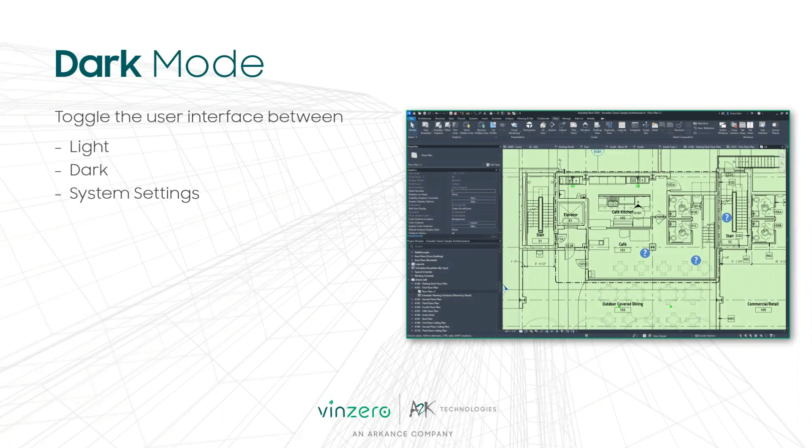You can control the canvas independently. I call this one drawing board green. To access the UI color state, you go to File Options, Colors. There you can specify colors for the background, selection, pre-selection, alert, calculations, and rebar editing. And of course, whether the UI is light or dark or relies on the Windows system settings.

Your Windows system settings can be found by searching for the word color in your Windows taskbar to bring up the color settings dialog. The default app mode will dictate your light or dark settings for Revit.

There's been a UI modernization to go along with the major overhaul. They've changed all the iconography, and this is in support of the light and dark UI. I think they've done an excellent job at tweaking the icons without making the new ones feel foreign.

The project browser search and performance is a huge improvement. In previous releases, the search was hidden away in the right-click menu. You'd have to cycle through results in the browser tree, and the search results wouldn't be filtered.

Looking at the new project browser, the search is persistent at the top of the browser. The search highlights and filtering is instant as soon as you start typing.

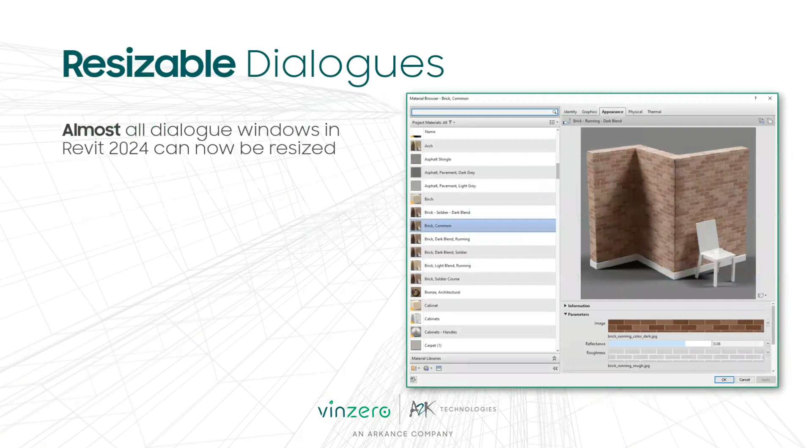Apparently, more dialog boxes have been adjusted now to be resizable. This isn't the case for all dialog boxes, so in this instance, it'd be handy to see the full file path. But I think they're making headway into expanding more of the user interface experience.

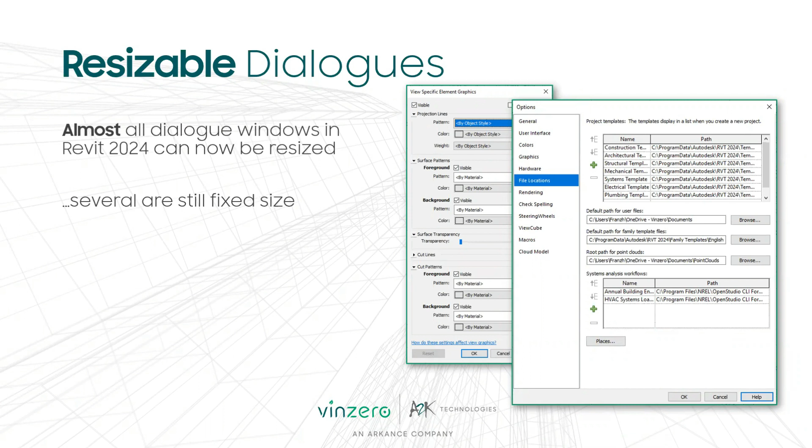Modelling improvements. There's a new series of templates. There's a new multidiscipline template that contains a starting view with updated fonts. So the new font they're using is Trebuchet and preloaded content for each category.

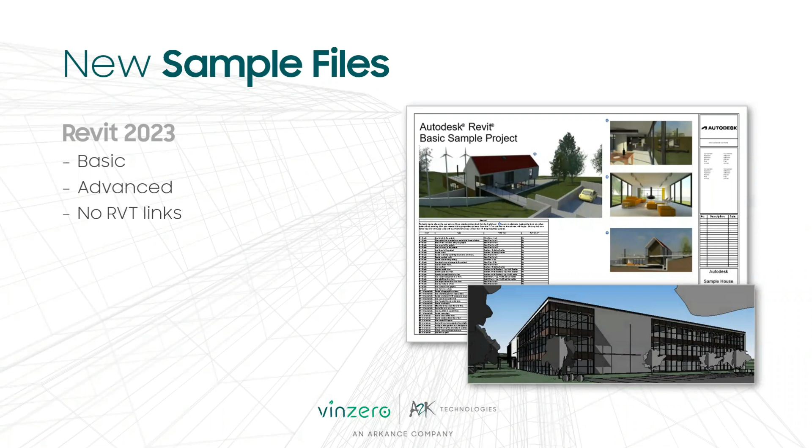In Revit 2024, there's a new series of sample files. In Revit 23, we had the basic house on the hill and the advanced office building. These were standalone files without any Revit links. Revit 2024 presents a new series of sample files covering all disciplines in separate Revit links, which is closer to a real world scenario.

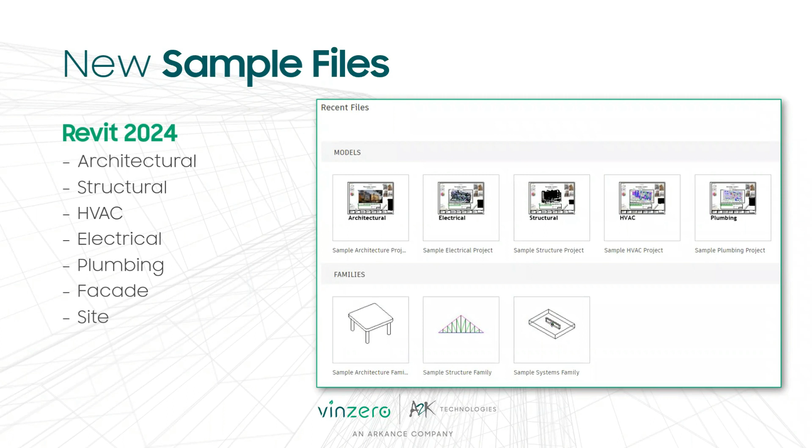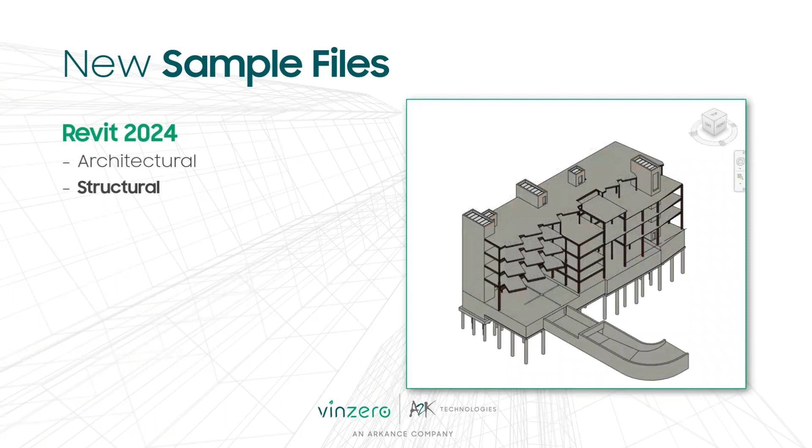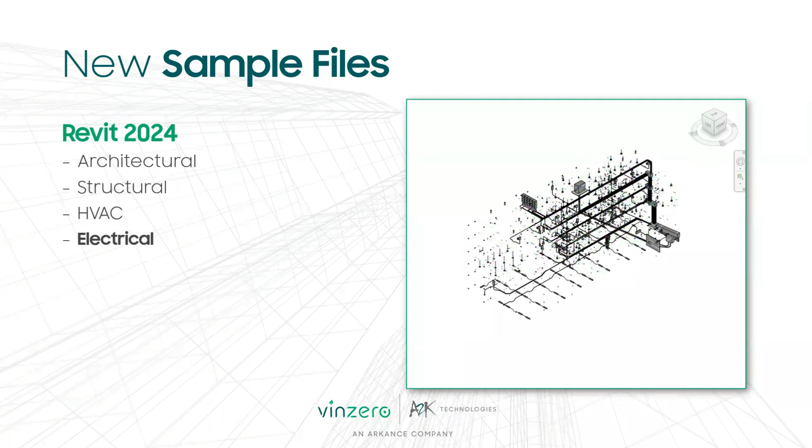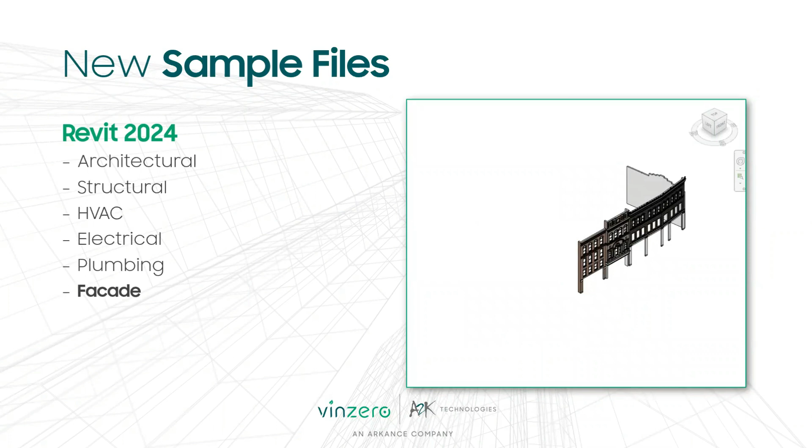We'll walk you through the content of each of these. We've got the architectural model. This includes advanced concepts such as phasing and design options. We have the structural model, which is predominantly concrete. The mechanical, heating, cooling and ventilation model. A full electrical model. Plumbing and drainage. And there's even a historical facade that's been modelled referencing a point cloud survey. And finally, there's the site model illustrating new Toposolid features.

So all these combine to present a real world example of how we typically work. There's a point cloud survey available for download via the Autodesk Revit 2024 website. It's a 5.7 gigabyte download, hence it's not part of your standard install. Once downloaded, the zip file expands to be about 8.5 gigabytes, the contents of which is a recap point cloud and a whole bunch of supporting files.

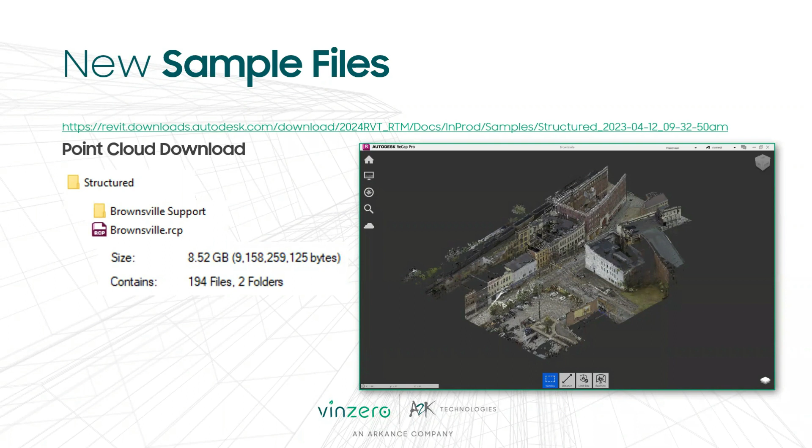Supporting files contain a number of registration points around the site. When viewing this in ReCap, the registration points will be listed down the left-hand side, and the point locations are illustrated in the top right plan view, where the line of sight cone of vision is illustrated with a blue gradient.

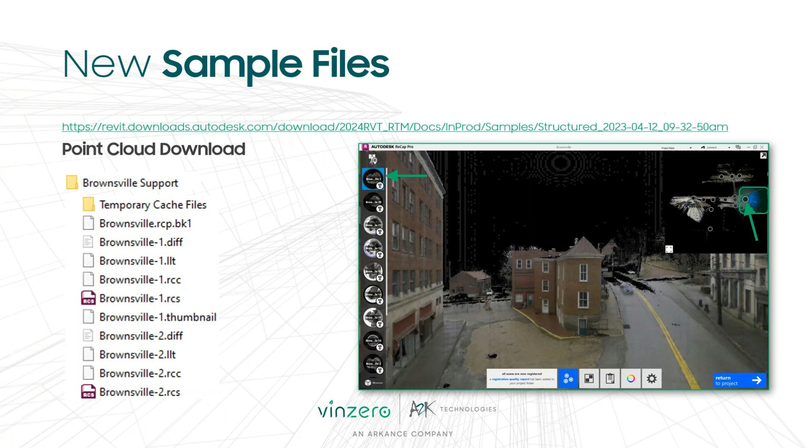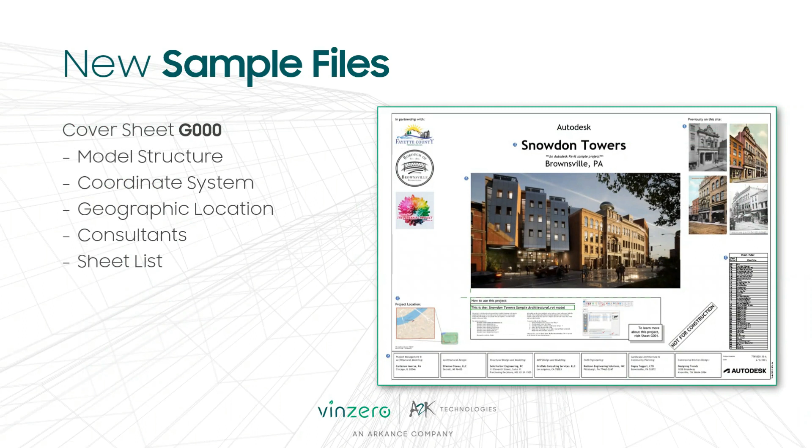Opening up the architectural model, the cover sheet G000 contains information on model structure, the coordinate system, and the geographic location of the project. There's a list of consultants and also a sheet list. Furthermore, there are instructions on how to use the project, providing insight on how the files and links go together.

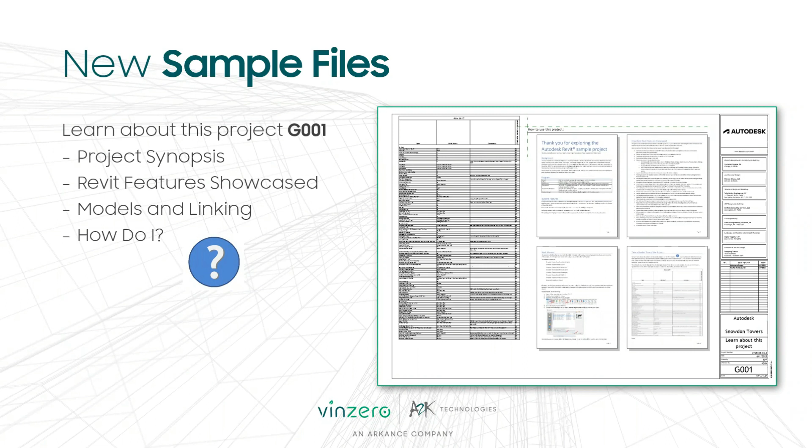On the second page, G001, there's a project synopsis describing where the project is and how it came about, a list of Revit features that have been showcased in the model, a list of models and links, and a schedule of 'how do I', which is this schedule with blue question marks.

The sample file is intended to double as a training tool to provide examples of various modelling techniques. From the schedule, you can see if you want to look for a particular modelling technique, which view best illustrates that feature. So if we're looking at placing stairs and railings, we can go to the Level 1 view to see more about stairs and railings.

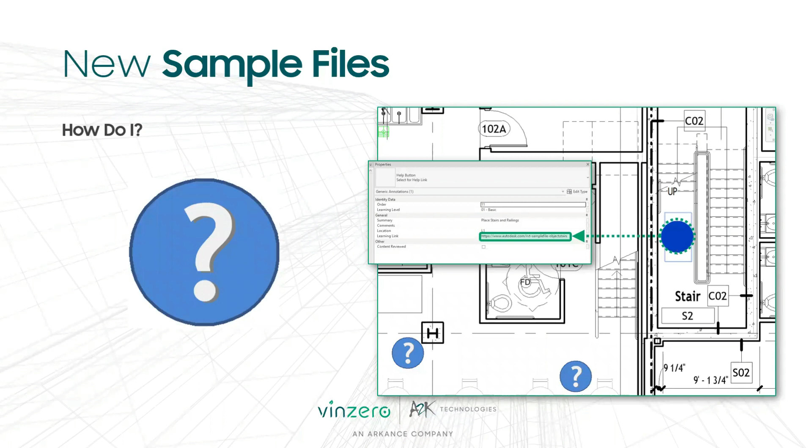These blue question marks are also populated across the drawing set. In the plan view here, these are generic annotation families. When you click on the family in the object properties, you'll see a learning link URL in the element properties, and that will take you to the Revit 2024 documentation online, where you can learn more about the features.

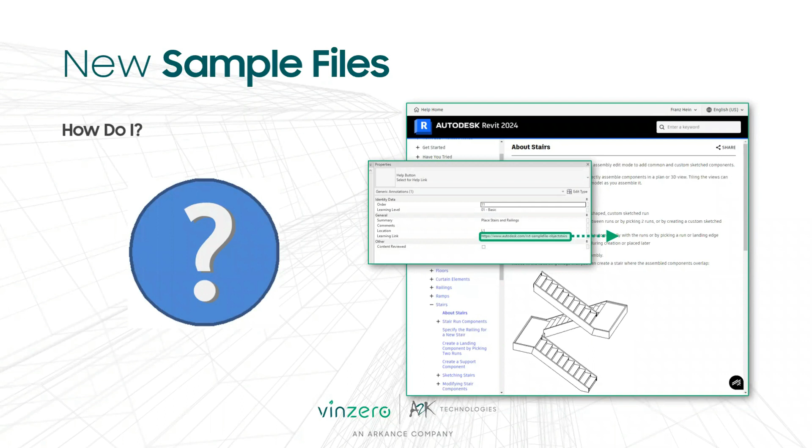The site tools for Revit 2024 have had a major overhaul. There's a departure from Topo Surface, and Toposolids now have volume.

Split surface and subregions have been replaced with subdivide. Now we've got more warnings to deal with or vet, as Toposolids are volumetric, so it will report when it's interfering with other elements.

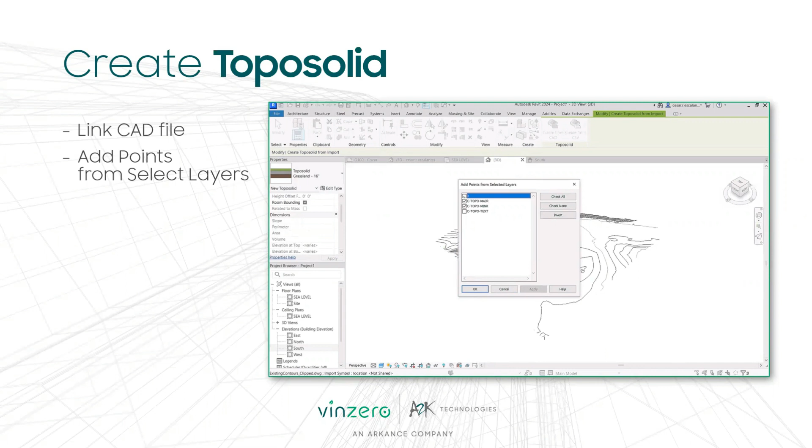To create a Toposolid from a CAD link, which traditionally is very similar to creating a Toposurface, you'd link in the CAD file, select Create Toposolid from Import, select your CAD import, and specify the layers used to generate the points. Typically these would either be contour layers, or if you've got a TIN, a triangulated irregular network, you may be using that layer.

When you click finish, the Toposolid will be generated using the current Toposolid type. You can swap types or duplicate a type, similar to any other system family. It's worth noting that Toposolids are room bounding.

You're not just limited to generating Toposolids via CAD links or imports. You can also generate these from a sketch or a CSV file of points if you've been provided with that data.

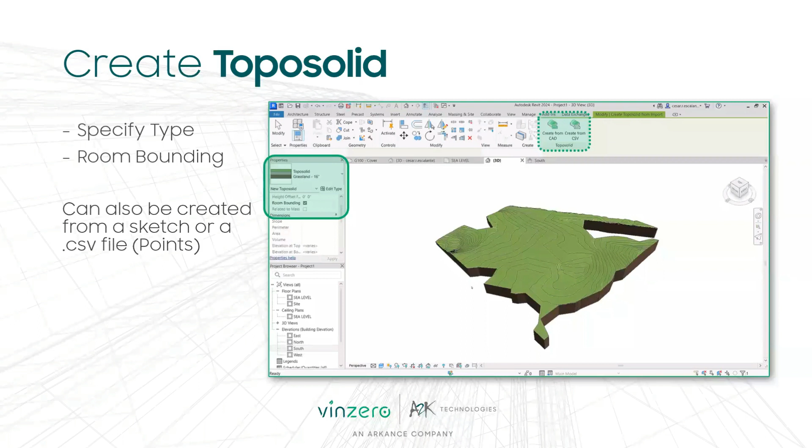If you're defining Toposolid types, you'll notice these are very similar to floor families — it's a composite layered structure which is editable. To access that, you go to the type properties and edit the structure.

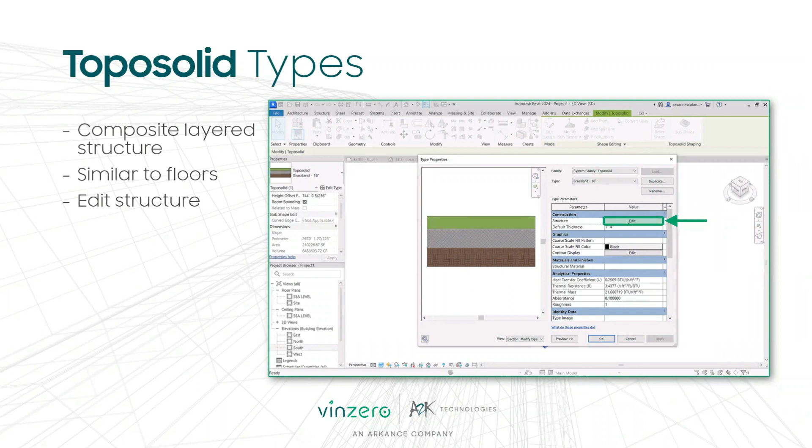Like floors, it has a core boundary, layers with thickness, function, and materiality, as well as specifying whether these layers are constant thickness or variable. What I've seen people doing is having the surface layers as constant and the underlying earth as variable.

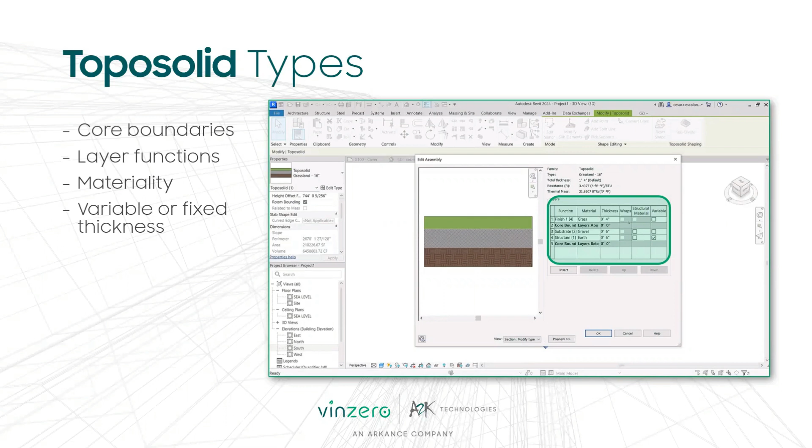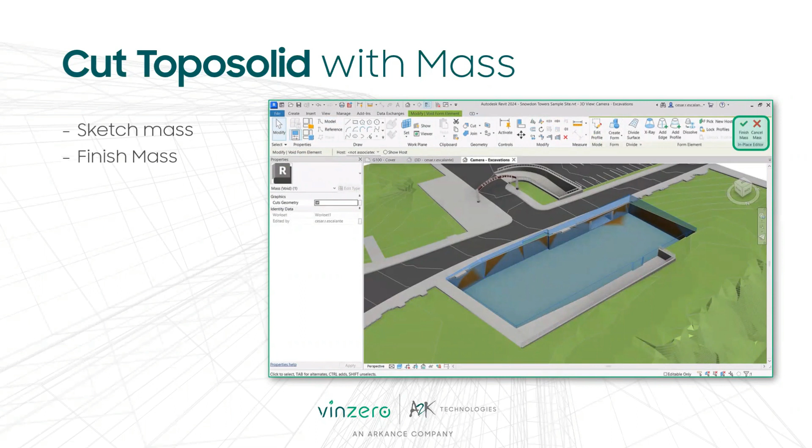There's no more pad tool, so this workflow has been replaced with the Cut Mass tool. To do this, you would sketch a mass using the in-place massing tools, sketching an outline and then clicking finish. As you finish the mass, that would basically sit in the hole, and you'd use Cut Toposolid with Mass to actually generate that hole or excavation in the ground.

Now that Toposolids have volume and can be cut with other elements such as mass, this opens up the opportunity to model subterranean structures, which would be handy for anyone working in rail at the moment.

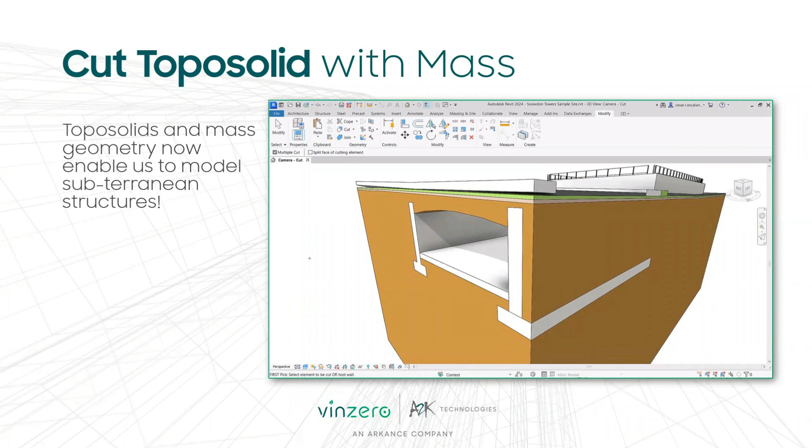Split surface and subregions have been replaced with Create Subdivision. What this does is it effectively places another single-layered Toposolid of specified thickness and material over the host Toposolid. It would have been nice if they allowed a negative thickness, but all subdivisions need to have a positive thickness offset from the host Toposolid.

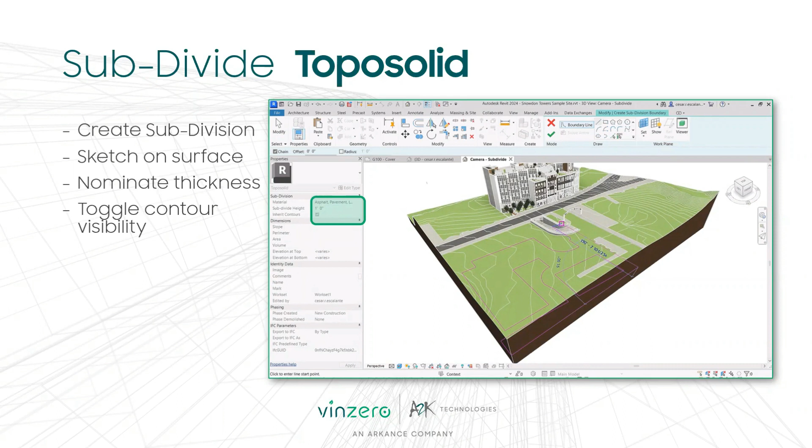You can toggle the contour visibility of these subdivisions, so if you don't want to see the contours, you can hide that. One of the benefits of these is they're really easy to move or copy across the host Toposolid — they literally just stick to the surface and float across it.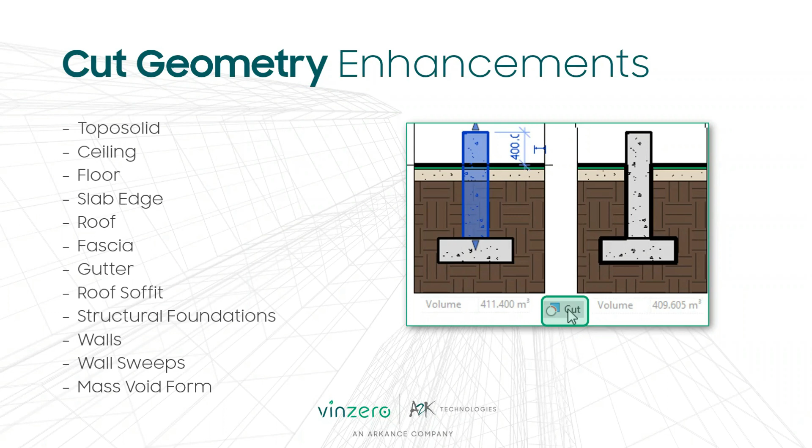So graphics - there's a variety of graphical improvements in Revit 2024, starting with the align surface pattern. In previous releases, if you were trying to align surface patterns on a floor that had been shape edited, you would have to use the paint bucket and paint the same material onto individual surfaces to control their orientation and alignment individually. You no longer have to use that workaround - you can choose to either align the entire surface or selected faces at a particular time.

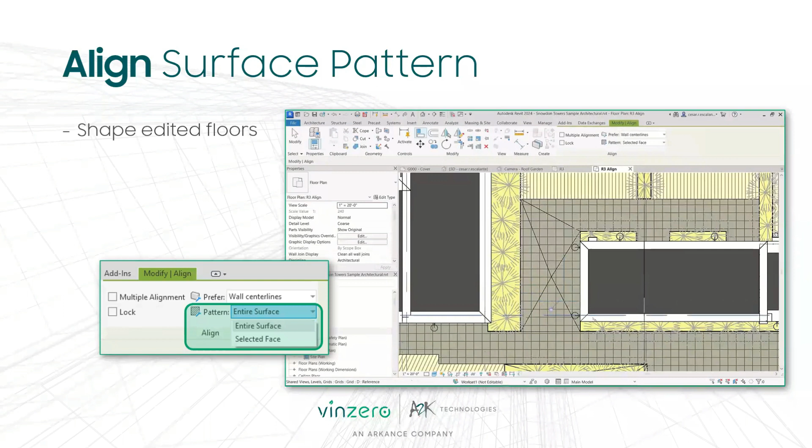Draw order improvements - in the family editor in previous releases, it's been a bit hit and miss. If it looked right in the family editor, it didn't necessarily look or print correctly in the project environment. The improvements they've made to this build mean it's more what-you-see-is-what-you-get. So you've got tools to bring to the front, send to the back, or bring above, bring below.

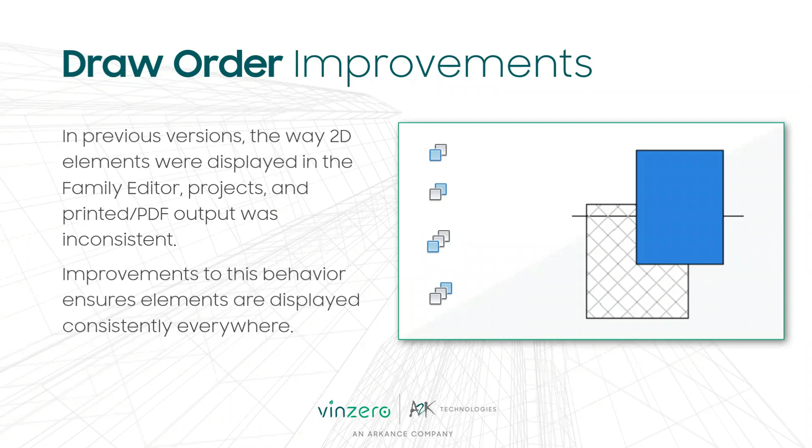Height of schedule rows that are only for schedules placed on sheets - you can specify that as a numeric value.

So, specifying the height of rows of sheets - you can specify this as a numeric value. This can either be to set the row height for all rows, or can be just for individual image rows. Obviously it's not going to squeeze down below the height of the typeface, but it's better if you're trying to fill a particular size on sheet.

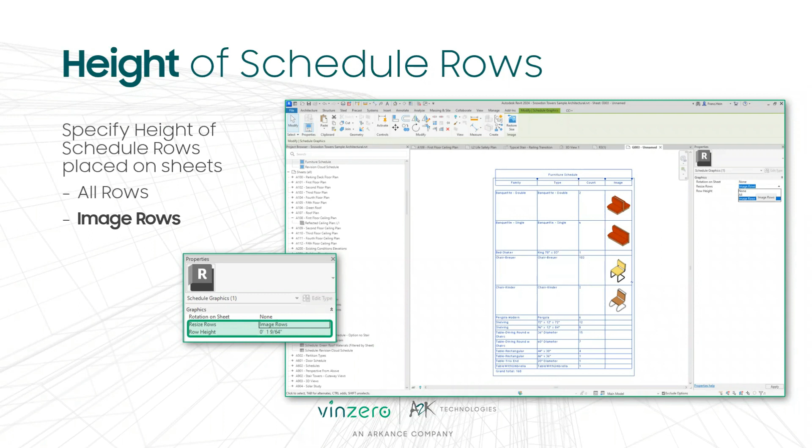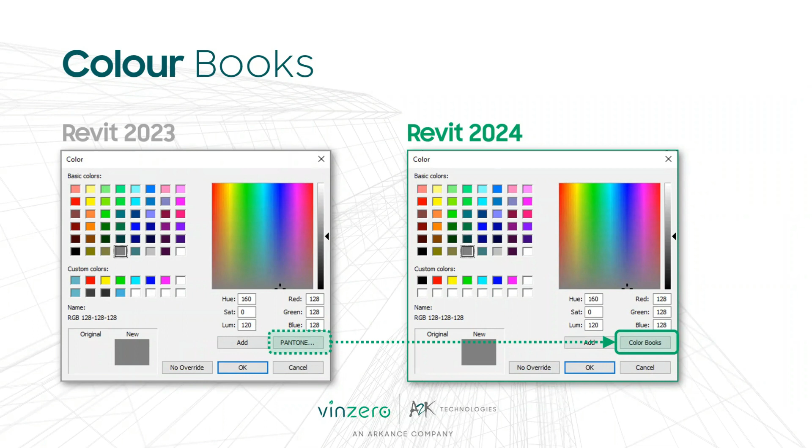Color books have been introduced in 2024. In the color picker in Revit 2023, you had the Pantone button - that's now been replaced by a color books button. Color books were originally developed for AutoCAD, but they've now come across to Revit.

Clicking on the color books button will bring up the color book picker, where you can slide through the pages on the right-hand slider, and then through each page pick a color you're wanting to use. This is one of the Pantone color books available.

There are several color books that come with the out-of-the-box installation, and if you want to know where those are located, they're sitting under Program Data, Autodesk, Revit 2024, color books. That's the default location that's stored in the INI file.

When creating the colors, you're specifying the color ranges as RGB, hue and saturation, CMYK, or hexadecimal values, giving each color a name. When you preview those color books, you can either preview as an image or as a print-friendly version - worthwhile previewing them before you export, just to make sure you've got all the information correct.

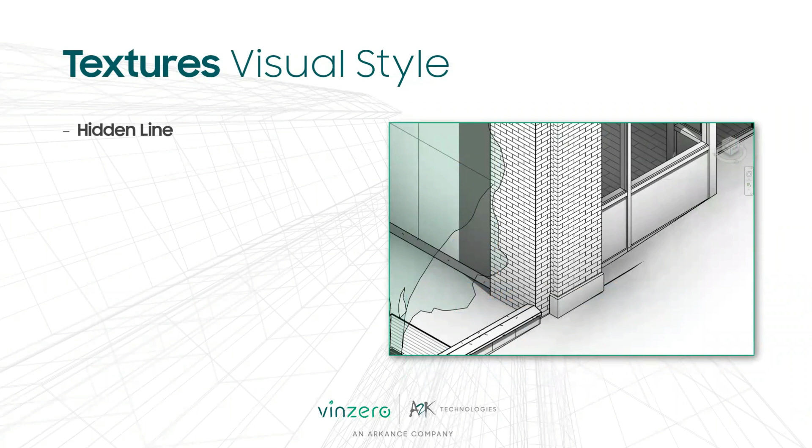So a look at the visual styles that there are - there's obviously hidden line. We've got shaded with edges, which basically changes the color based on the orientation to the light source. We've got consistent colors, that maintains the same color regardless of where the light source is.

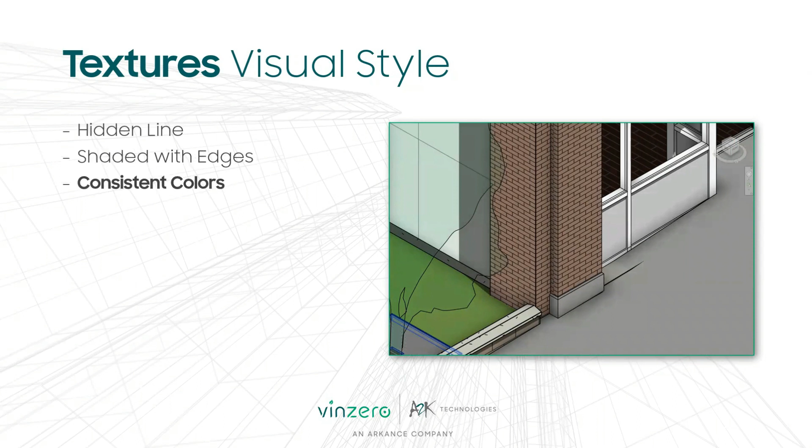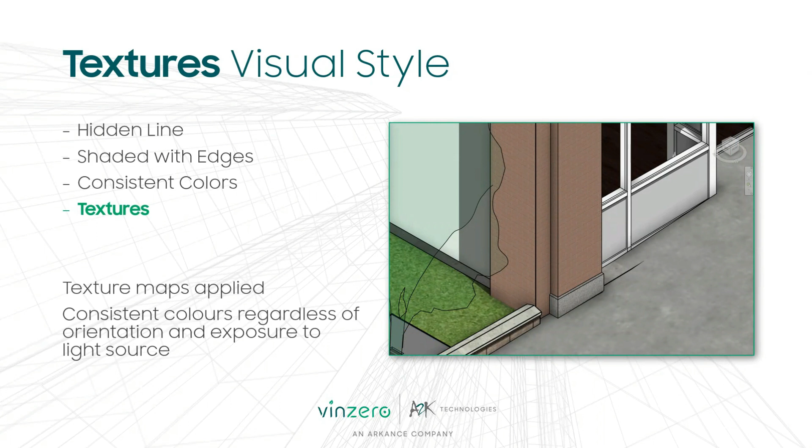The texture style now applies texture maps, but treats it more like consistent colors - so regardless of the orientation or exposure to the light source, those texture maps remain consistent. You can see with realistic, the colors vary depending on the orientation and exposure to the light source. So it could be a useful presentation tool.

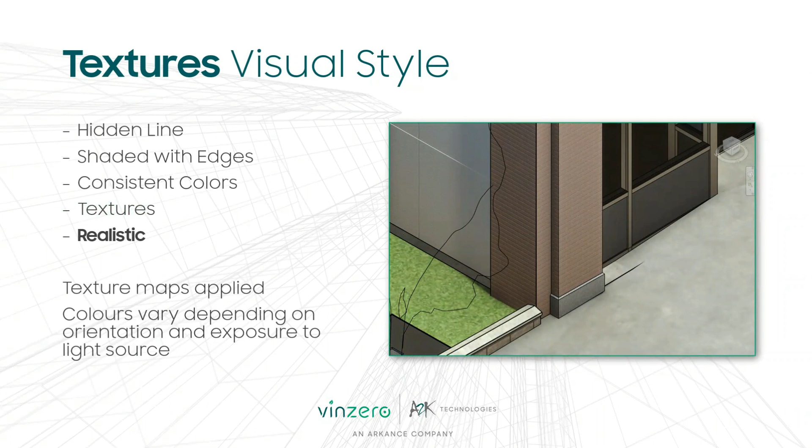Where I could see these being of real value is in, say, overall elevations, where you're wanting to convey materiality a little bit better, but you're not wanting to display all those dense hatch patterns that come with the other visual styles.

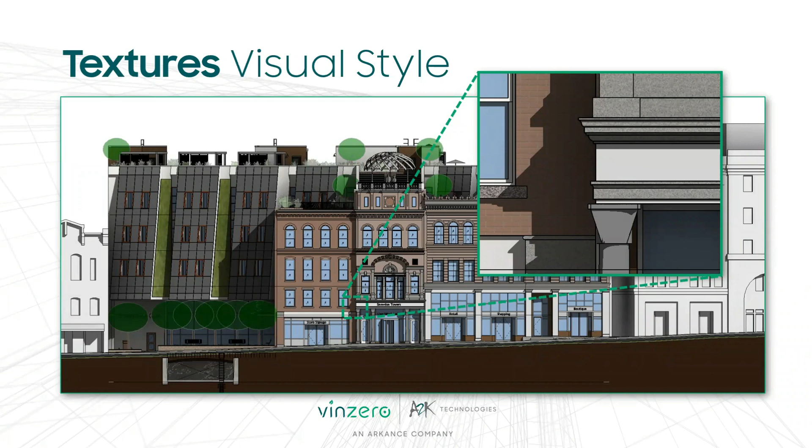Revit to Twinmotion. This was announced back in September 2023. Autodesk has partnered with Epic Games to essentially provide Twinmotion for Revit to anyone who is a subscriber to the Revit software. Worth noting, there's some minimum hardware requirements, and there's separate installers for both 2023 and 2024, so you need to install it twice if you're operating both flavors of Revit. You can find the download via the Autodesk products page, just search for Twinmotion.

Twinmotion is basically integrated into the Revit view tab, and you can either open the file in Twinmotion, which detaches that from Revit giving you a standalone copy of the model working in Twinmotion, or you can sync the model to Twinmotion, meaning whatever changes you're making to materials and model elements in Revit is actually pushed across to that real-time environment.

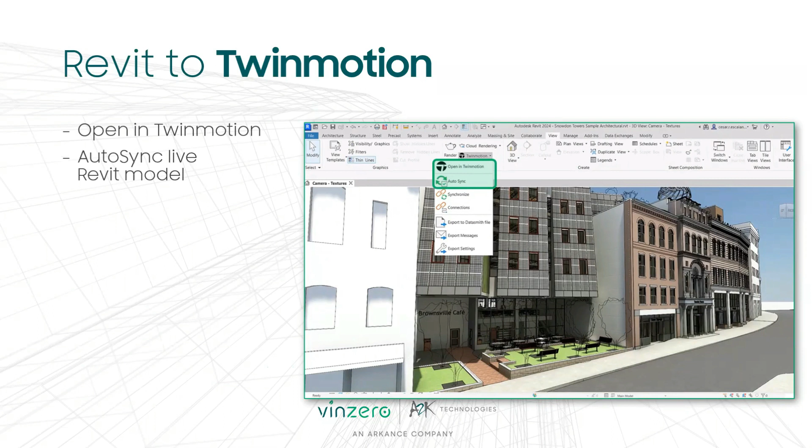So it's capable of producing really lovely imagery. It's a real-time renderer, full of high-quality assets and entourage, so all these storytelling tools such as people, trees, vehicles, all that sort of stuff. You can export and share the file formats via either fully navigable real-time 3D presentations or pre-rendered panoramas to share with your clients.

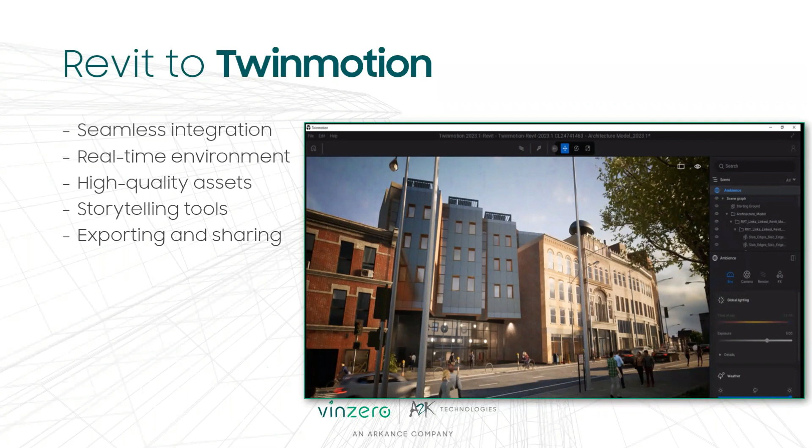So this is just a nice little show reel to show what Twinmotion is capable of. We'll dig into the productivity tools now.

Opening sheets in Revit 2023, when you're in a view and you use the right-click menu, you could at best maybe find a referring view. But now in Revit 2024, if you right-click in a view, you'll find Open Sheet, which will basically take you directly to the sheet that the view is placed on.

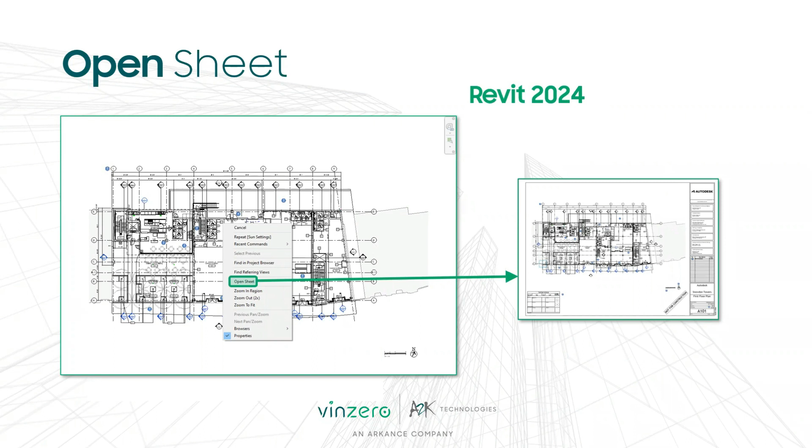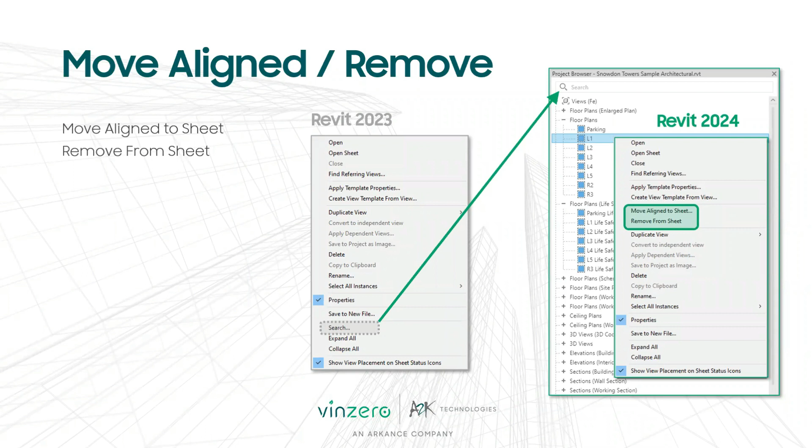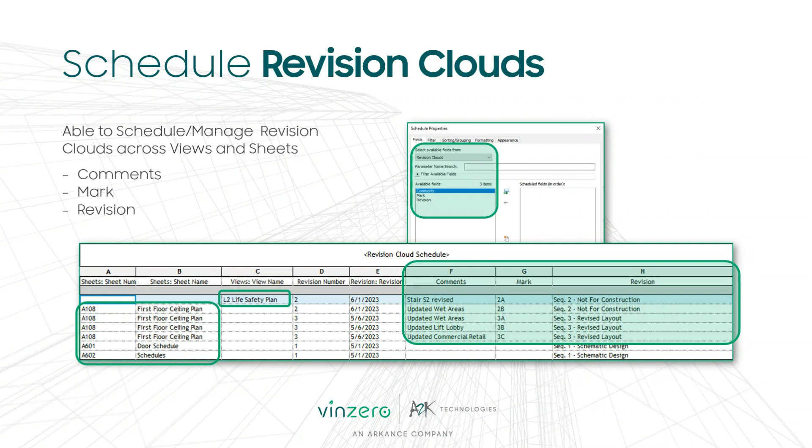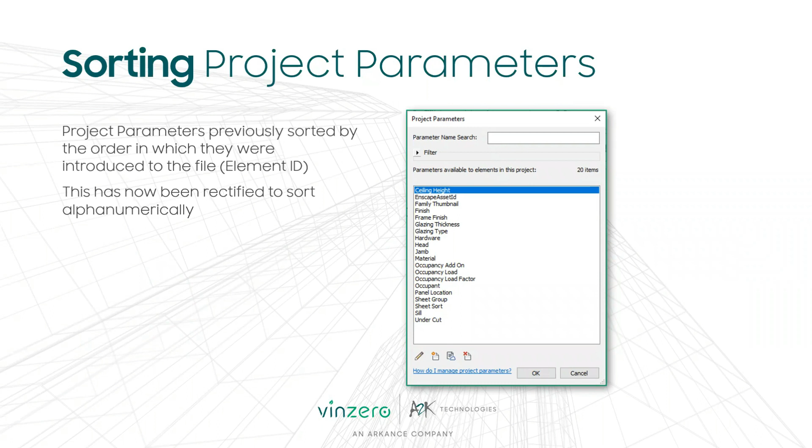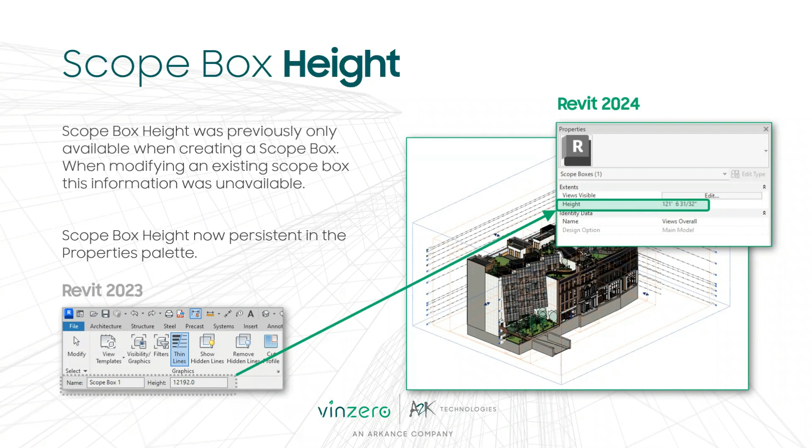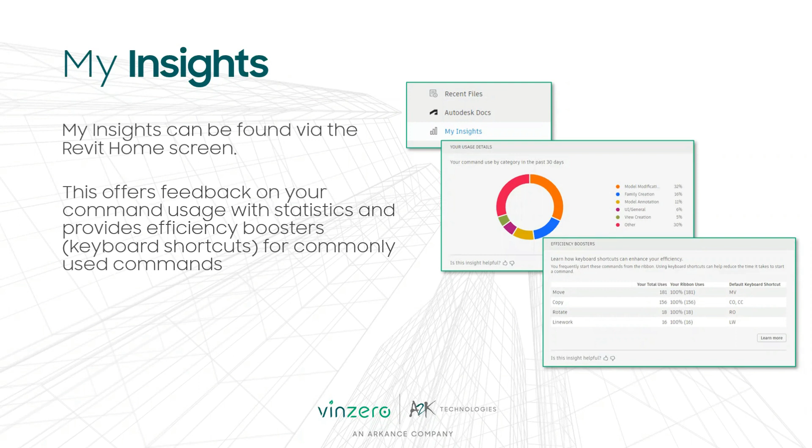Insights also includes short videos and snippets of feature recommendations. These are all discrete topics presented based upon your user behavior and how Revit sees you using the tools and what you could better use.

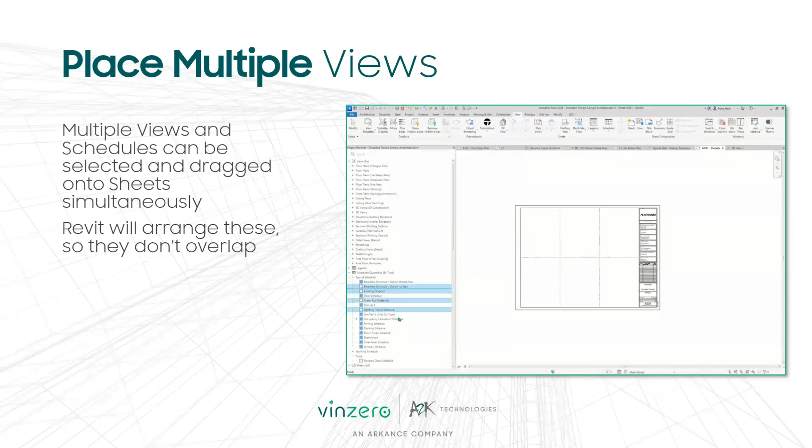You can now place multiple views on a sheet, so highlighting and dragging and dropping multiple views. It will keep those separate so they don't overlap. Sometimes you may need to rearrange those, but it does a pretty good job of arranging things like views or schedules and being able to place all those in one go.

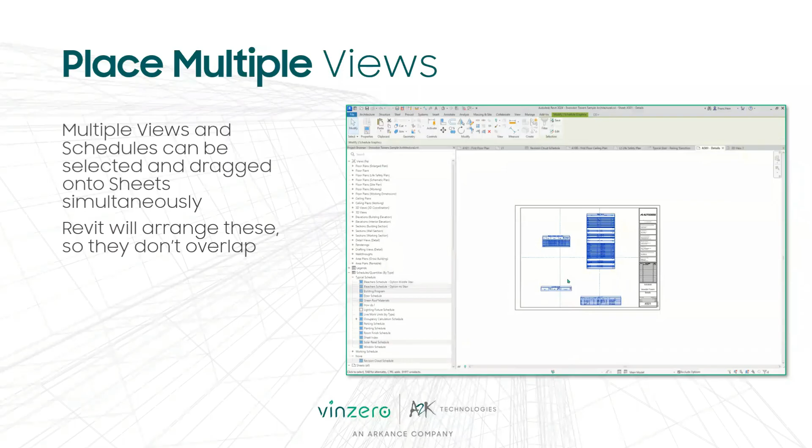Collaboration and coordination.

The cloud collaboration cache was hard-coded up until this release. You can now specify where that goes, and the beauty of that is if you have, say, a partition C drive and you want to move it across to a D drive, or even potentially move it over to a network resource, you can now choose where that collaboration cache lives, and it doesn't have to be under the user profile anymore. So it's your choice as to where you store the cloud collaboration cache files.

Linking coordination models. You can link them from your desktop. If you're linking locally, the only file formats allowed are NWC or NWD files. However, if you're linking from the cloud through Autodesk Docs, there's a whole range of file formats supported, around 60 or so.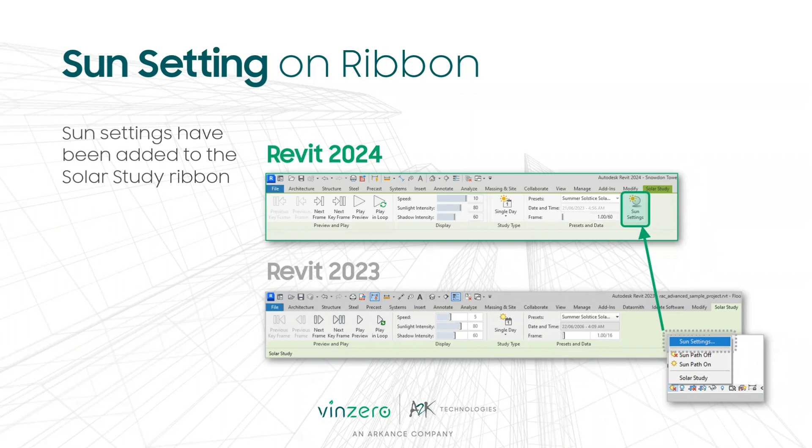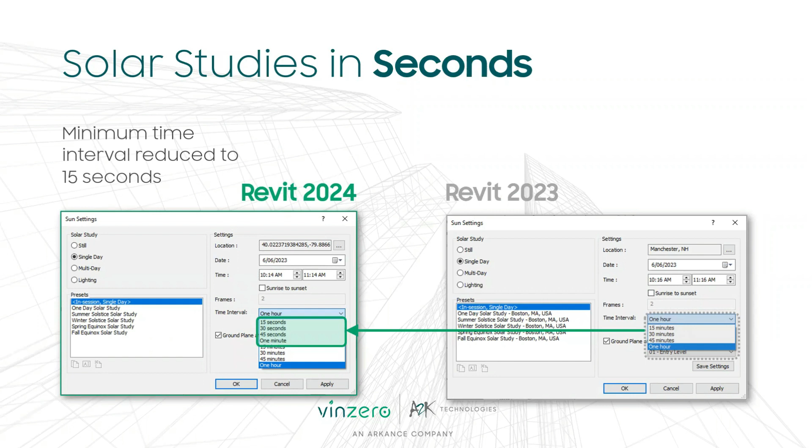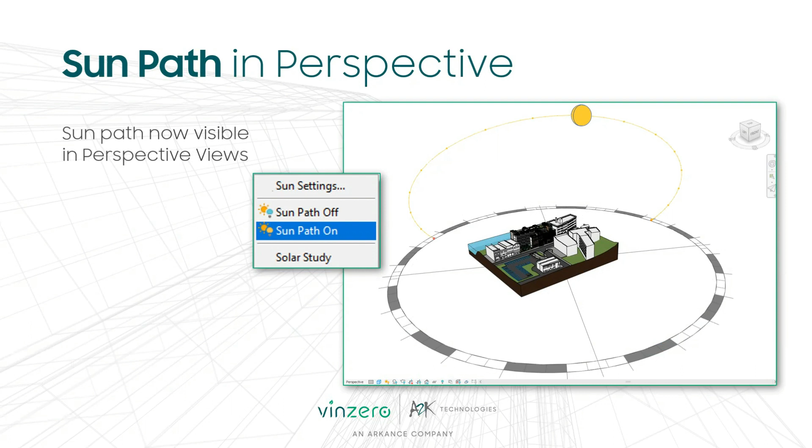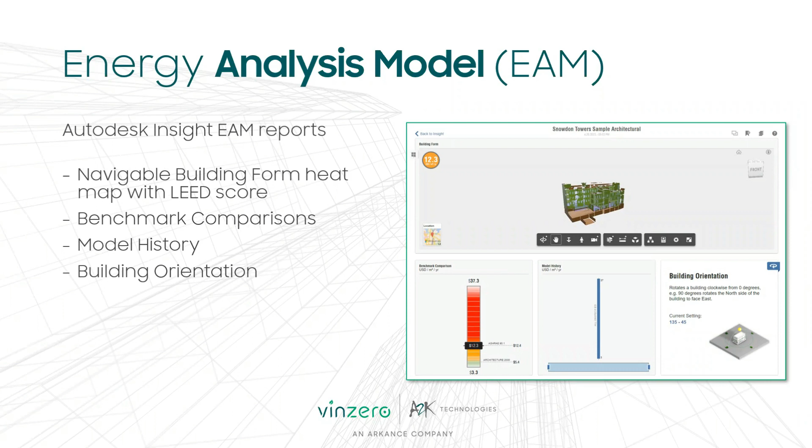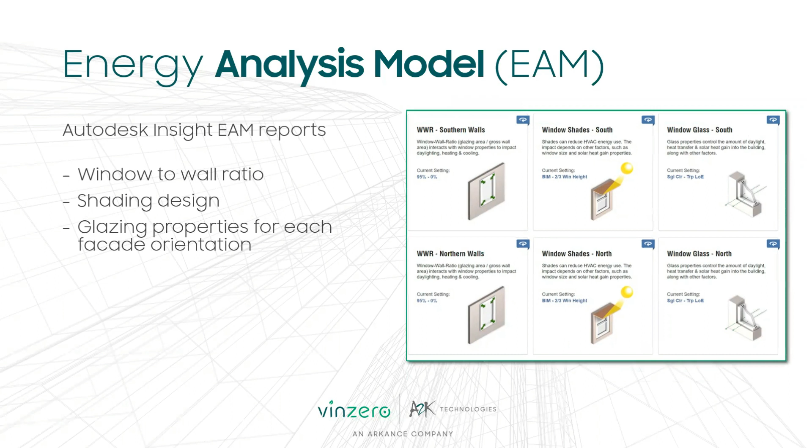The Insight energy analysis model reports via a navigable building form with a heat map applied, and provides you with the LEED score. There's a benchmark comparison to see how you're tracking, model history, and a snapshot of the current building orientation. Other things reported are the window-to-wall ratios, the shading design and how efficiently it's performing, and the glazing properties for each facade orientation, running through east, west, north, and south.

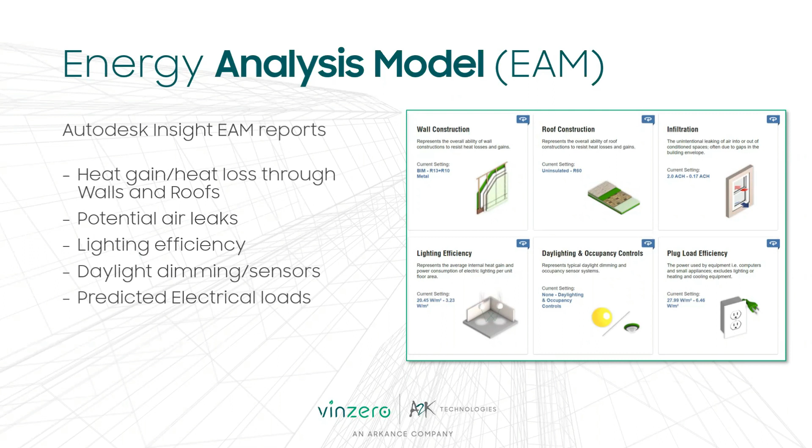It also looks into the system side of the energy model: heat gain and heat loss through walls and roofs, potential air leaks through windows and doors, lighting efficiency, daylight, whether you have dimming devices or sensors that control lighting through light levels, and predicted electrical loads. Finally, the heating and cooling systems efficiency and the hours of occupation you've inputted.

Photovoltaic panel efficiency, payback period for the solar panels, and the percentage of surface coverage you have for those solar panels.

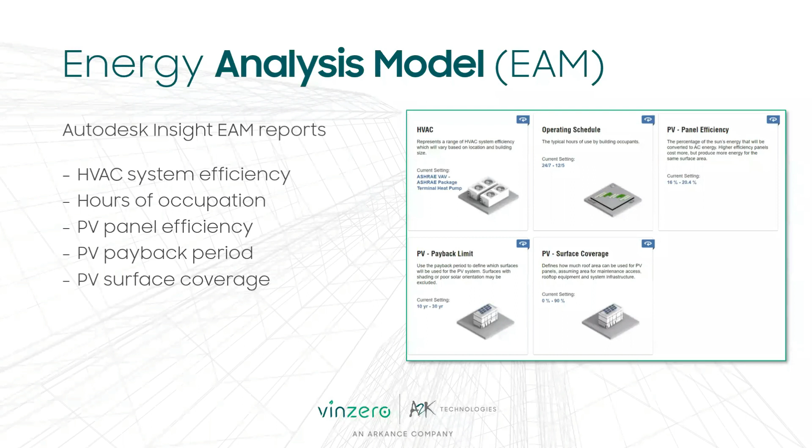So that pretty much concludes the feature presentation. I'm well short of an hour here, but it leaves about 20 minutes for discussion or questions if you want.